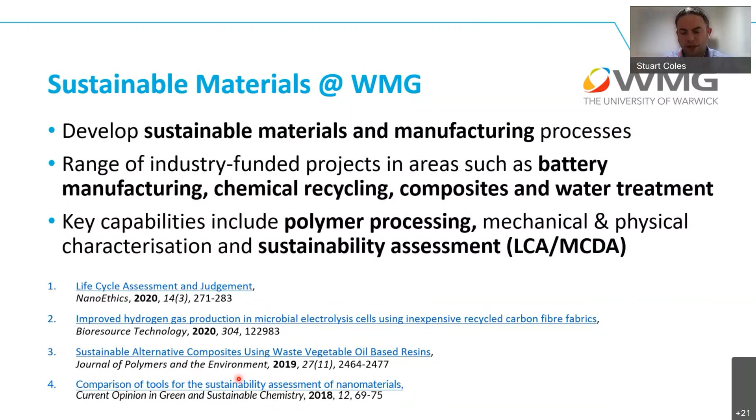So we start off with vegetable oil as a renewable feedstock. We know we can get vegetable oil everywhere, particularly in the UK. It's a crop that grows really well. Rapeseed oil, particularly during the spring and summer months, you can see lots of bright yellow fields up and down the country. So there's lots and lots of vegetable oil that's around. Very easy, cheap source of feedstock.

There is potential conflict maybe with using a food source material for non-food uses, but we have some information that suggests, certainly from work done by the World Bank, that perhaps the conflict between food and non-food use isn't as stark as people would like to think. But it does cause us a problem, and we'll refer back to it in a moment.

But we know we've got vegetable oil, and we can epoxidize it as well to create a material called epoxidized vegetable oil, which is a very large industrial chemical, well over 200,000 tons a year. Typically, it's mostly used as a plasticizer for polyvinyl chloride, and sometimes as well, it's a reactive diluent in epoxy resins. Only not so widely there.

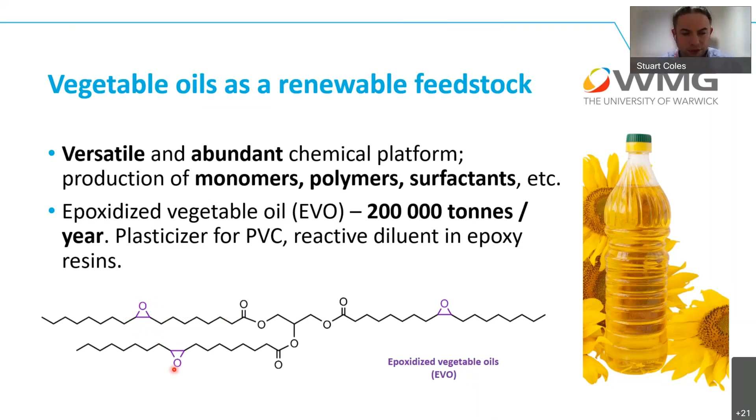Triglycerides generally look like this. We have like the three arms. This is what it would look like when it's epoxidized. So you've got these epoxide groups there. As I say, they can be ring opened, moved around, changed as and when.

Now, ideally, what we would like to do within the automotive space, certainly from my perspective as an academic in the area, we want to increase the amount of bio-based material within these applications. We want to reduce our reliance on fossil-based materials. But the problem with doing this is that the materials themselves aren't necessarily economically competitive. Often the weight or the performance or the cost gets in the way, and there become some real challenges in using these materials. We have additional insecurities in the food supply chain, plus concerns about that food versus non-food usage.

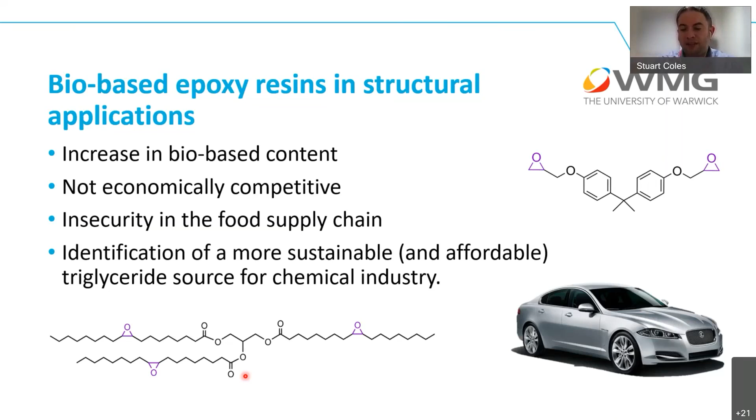And so because of these two key factors, what we thought was that what we should really try to do is avoid using a food-based material. Is there a more sustainable, more affordable oil source that we can access that would allow us something that at least reduces some of these barriers?

And we started to come across the problem of Fatbergs. Now, these are effectively very large lumps of fat and solid waste and grease that just congeal and solidify within sewer systems. Within the UK, it's estimated that around 70% of all of the blockages that you find in sewers are caused by these Fatbergs. And it's not only just the oil, but sometimes you get wet wipes from babies and nappies and other such things. Anything sort of solid that goes down the toilet congeals with the oils, and in the cold temperatures, particularly in the UK, when you can get well below freezing during the winter, it does make it very difficult for these materials to stay liquid, so they solidify and then they congeal.

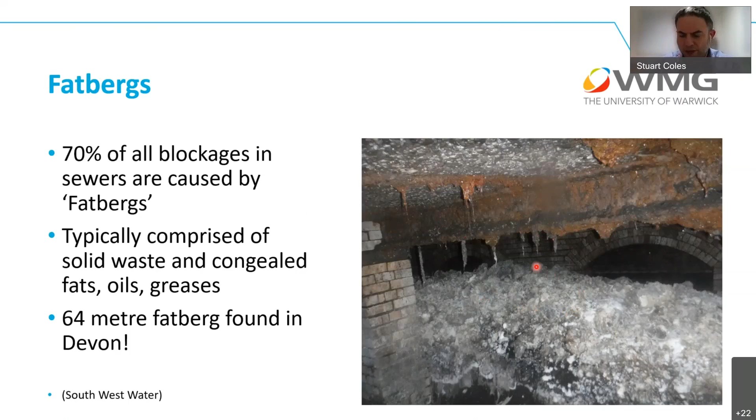The image here is one that is a picture of one that was 64 meters long, that was found in Devon, which is in the southwest of the UK. Probably the more famous one was the one that was entitled #Fatberg. And that weighed 130 tons and was the length of 2 football pitches, and found in London in the sewer systems there. It took nearly a week of intense work and road closures to clear that out. So there was a huge disruption and economic cost and problem from getting rid of this blockage in the sewer system, which in the UK is quite antiquated now.

So this was clearly a problem, but waste oil, fats and greases are ending up in the sewer system. So we want to avoid that and find a different use for our waste oils. Now, quite a lot of the time at the moment, waste oils will be used to make biodiesel. So you'll take your waste oil, turn it into biodiesel, and run a truck or a tractor or a car or whatever it might be on it. The issue with that is, in the long term, diesel engines are going to be phased out.

So we need to think about what options we have outside of that diesel space. Plus, the quality of the diesel fuel that you get from it isn't quite as good as what is conventionally there at the moment, and certainly not good enough for some of the more high power, high demand applications.

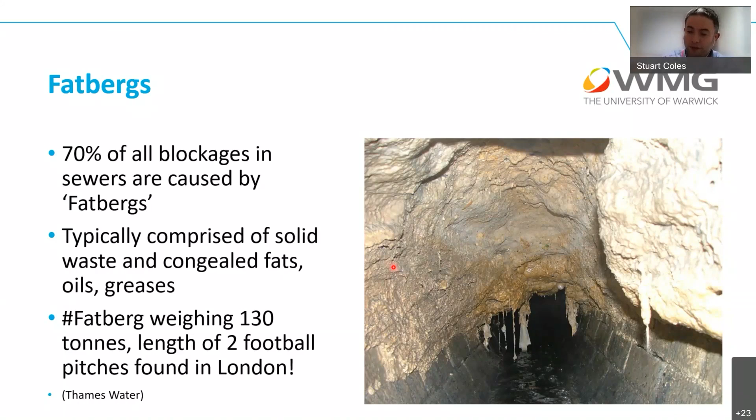So we get our non-edible and abundant source of triglycerides. We have a societal factor because we're reducing the blockages in the sewer system. It also helps tackle some of the oxygen depletion that you get in the water, because the fats don't cover the surface of the water.

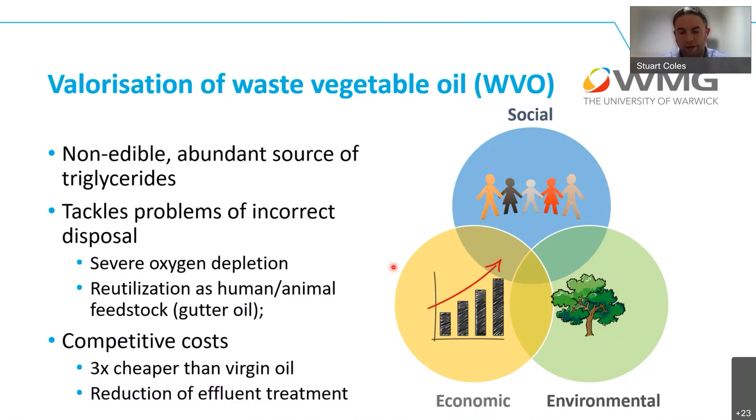We're not having people effectively try to reuse it as another feedstock for the food system. And we also get something that is economically cheaper than virgin oil and reduces costs of effluent treatment, and the economic costs of dealing with the waste, digging up roads, all of this kind of associated problem-solving after it's been broken down.

And so that to us meant that we were finding something that we could at least claim was a more sustainable source than what we'd done previously. So that became our starting point.

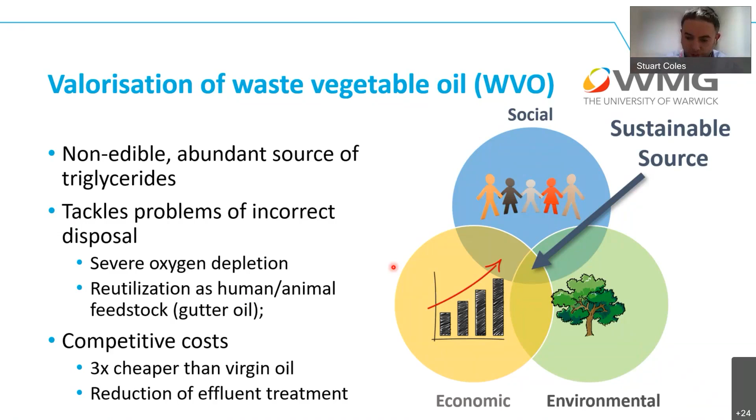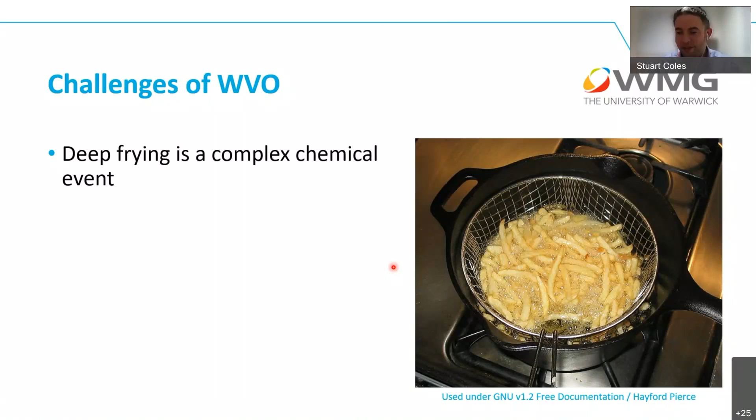But obviously, this waste vegetable oil was waste - it had been cooked with. One of the first challenges was understanding what was going on to the oil before we got to it. When you're deep frying, and in the traditional processes used for cooking oil, particularly in restaurants and large-scale food preparation, oil's largely used in deep frying, and that in itself is quite a complex chemical event when you look into what's going on.

You've got degradation processes happening to the oil, things like hydrolysis, because there's still water in there, and particularly the food that when you drop it in adds water to the system. You've got thermal oxidation of the triglyceride. You've got potential polymerization of some of the chains to make oligomers and dimers, trimers, etc.

All of this effectively reduces the degree of functionality that you have within that oil. So we started off with the oil having a nice versatile feedstock, but we know that through the cooking process we were going to start to reduce that level of functionality. One of our first challenges was to understand how much that functionality was going to be reduced, and whether we could mitigate it in any way, or whether it was actually going to be a problem in the first place.

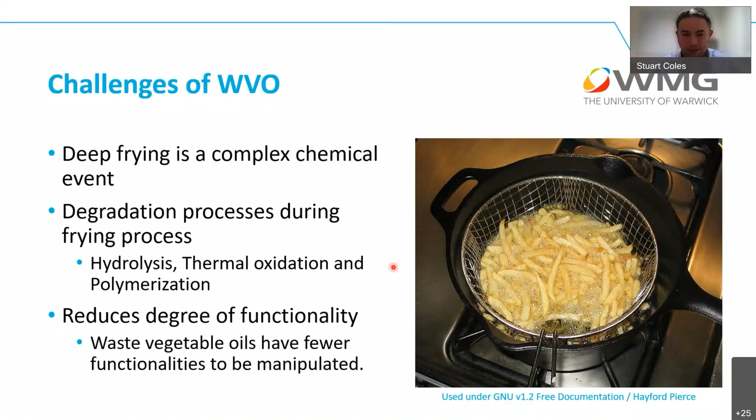So we've got a number of processes here, but we're looking at how much do we maintain as triglycerides, how much are we getting as mono, di and free diglycerides, free fatty acids, are we getting dimers and trimers, epoxies, are we ring-opening those with alcohols, and are there any other thermally degraded species in there as well?

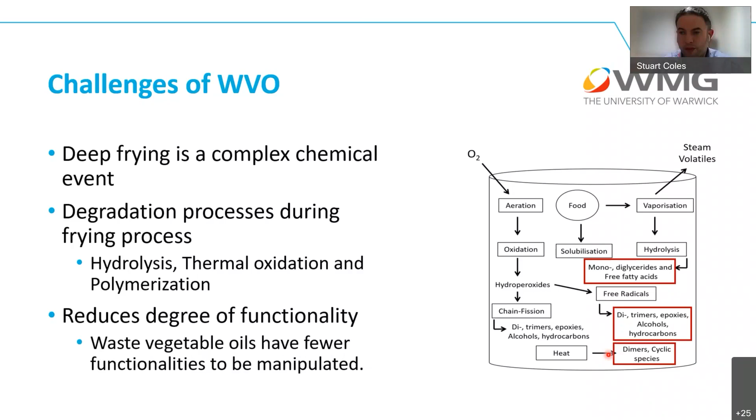So our first step was to just purify it and do some simple purification and epoxidation steps. The purification step, we literally stripped straight from biodiesel production - it was exactly the same process that we used there.

So you take the waste oil, effectively filter it to remove any lumps of burnt food and debris that are in the oil, and then add a very small amount of water. If you add too much water, you start to have the potential to produce soap, so you keep that to a minimum, but you do a small amount of water quite a few times in order to remove the polar compounds that you've got - maybe some of even the monoglyceride, some of the more water soluble materials, they all come out in that purification step.

And what you're left with is a vaguely clean triglyceride material - not perfectly clean, but it is certainly a lot cleaner than it was before doing that step.

From there, we knew that there were still some double bonds in those materials, so that gave us the door opening to allow us to get in there and do some functionalization with these materials. We tried a number of different routes with acetic acid and a little bit of sulfuric acid. We also tried a more traditional organic chemistry route using MCPBA and chloroform.

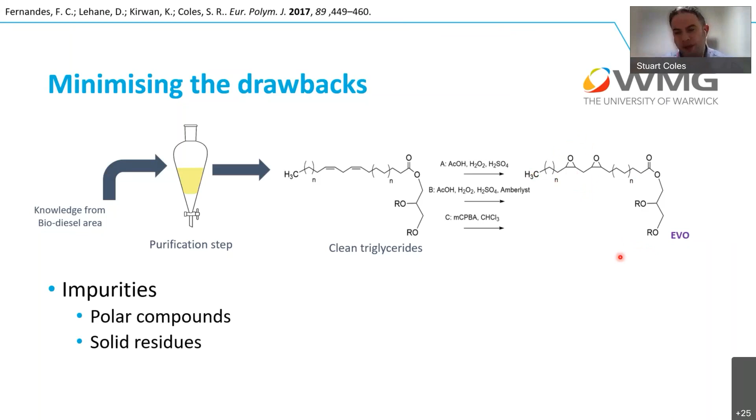That itself is not particularly unheard of, because epoxidized vegetable oil, as I already mentioned, is a very large industrial material. We're just trying to do it in a slightly cleaner, more sustainable way.

So once we got our epoxidized vegetable oil, we took the really just very basic straight approach. If we got a standard commercial DGEBA epoxy resin that was cured by an amine and then just dropped in a certain percentage of bio-based material, what would happen to the resultant polymer that we made?

So we added effectively 3 different types of the oil: the neat oil, so we managed to source the oil before it had been cooked with, after it had been cooked with, and then after we'd cleaned it up as well. And that's the 3 different stages that you see there: neat, purified, and waste.

The oil mix in itself, for completeness, was a mixture of palm oil and rapeseed oil, and it was sourced conveniently from the university's library cafe. So we were utilizing a waste material that existed on site that was a problem for us to deal with as well. Again, really ramping up the sustainability credentials of this work.

So with this particular oil mix, one of the things we found pretty much straight away, if we look at the Young's modulus when you add some vegetable oil based content in, is that across the board, the Young's modulus goes down. Absolutely not a surprise. We're adding effectively a material that is a known plasticizer into a system, and we get a reduction in the modulus.

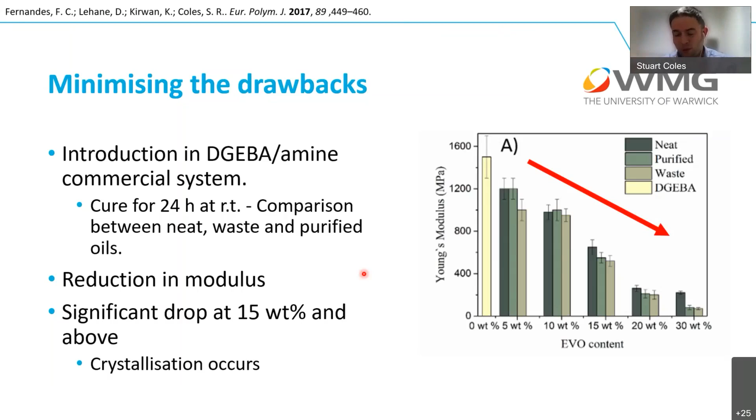And one of the things we looked at was this product here, which is effectively a milled carbon fiber. That's a reclaimed carbon fiber that's effectively a powder product, which can be used as a quite cheap, sustainable filler. It doesn't have anywhere near the environmental impact of virgin carbon fiber, because it's effectively reclaimed waste material that we're then doing something with.

And we did that from 1 all the way through to 30% of carbon fiber, with the standard DGEBA system and our 10% epoxidized waste oil. And we can see again that as we add carbon fiber in a composite structure, we get an increase. Now, we don't ever reach the same levels as DGEBA.

The DGEBA system is always better in terms of its Young's modulus in comparison to the vegetable oil one, but you can see a steady rise, and we're getting well over where we started with. So if we wanted to get back to that product system, or at least equal or exceed it, then the use of milled carbon fiber was a simple way of returning those properties and getting them back up. We've got 30% milled carbon fiber with 10 weight percent of the epoxidized vegetable oil.

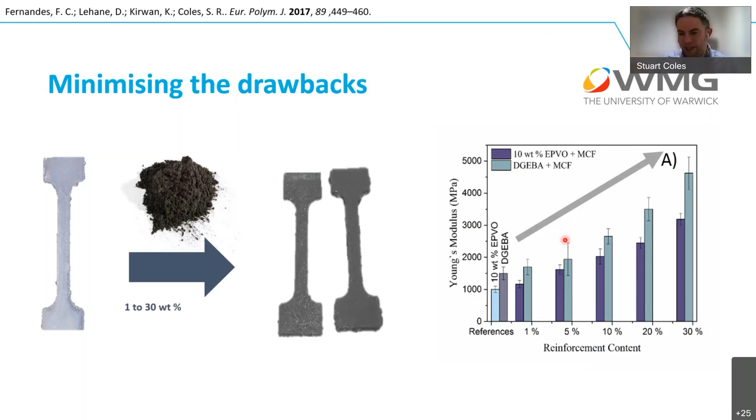One of the other reasons we found problematic was that the amine hardener in our system wasn't particularly good. It didn't really react with these internal epoxy rings. If you had the epoxy ring at the terminal, it would work really well, but here, because of the steric hindrance of these large bulky amine hardeners, we weren't getting a reaction. There are a couple of examples of what these amine hardeners typically look like within epoxy resin systems.

So one of the things we wanted to look at was whether we could change these cross-linkers and hardeners to something that would work better with our vegetable oils, while still maintaining reactivity with the DGEBA system, ensuring compatibility between the two.

We then looked into starting to optimize the formulation a little bit, and we did some design of experiments and statistical analysis to optimize for the best formulation we could think of.

One thing I didn't mention on the previous slide was that the difference between purified and unpurified waste oil, before and after, was fairly minimal. So the purification step was well worth putting in there for the consistency of the product. We just compared the purified waste oil versus the neat oil.

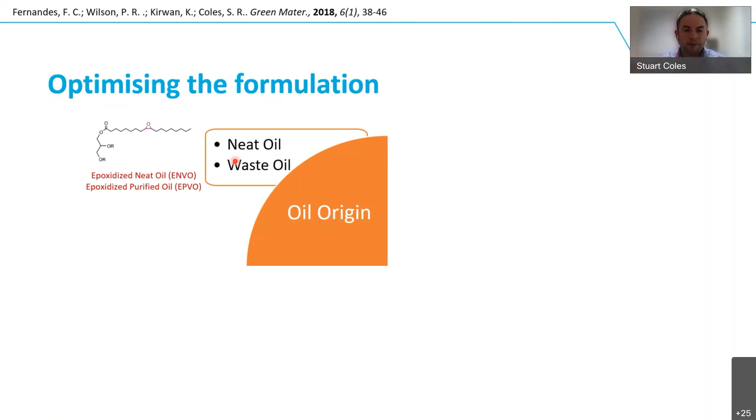Then we looked at the hardener, and we had two particular anhydrides: phthalic anhydride and methyl hexahydrophthalic anhydride, as two versions of different types of hardener. We varied the molar ratio of the hardener between 0.8 and 1.4, so maybe a slight excess of the oil or a slight excess of the hardener. Then as a catalyst to start this off, we tried two different catalysts as well, one being triethylamine and one being 2-methylimidazole. The idea was really just to do a broad range of experiments to find the best way to get the most bio-based content into a polymer without significantly dropping the properties.

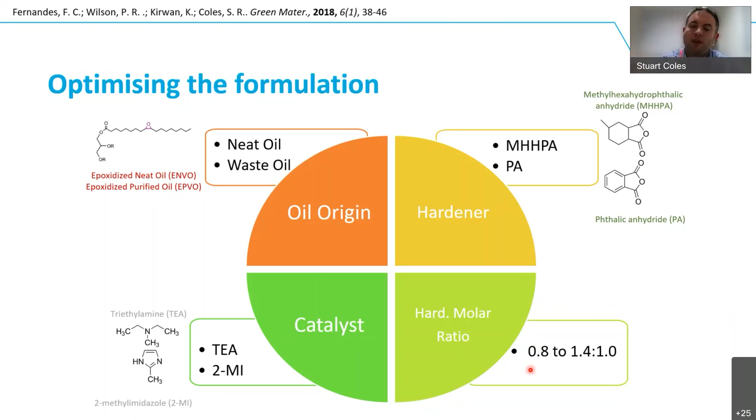So here, again, we did our blend of palm oil and rapeseed oil, after it had come out of the cooking, purified it with a little bit of aqueous extraction, and characterized the number of double bonds to know exactly how many we had. The difference between the neat oil and the waste oil was about 0.7 of a double bond equivalent. So we lost quite a bit of chemical functionality, but there's still quite a lot on average per triglyceride unit, well over two double bonds, so there's still enough reactivity there to do something with.

We then did the epoxidation, which was controlled. We see a little bit of a drop in the number of epoxy groups because of some side reactions going on, but it's still relatively in line with the oil, so we're not significantly differentiating between the two at this stage.

Then we added the hardener, which effectively ring-opens and cross-links to form that more traditional epoxy resin that we know. With that, we added either the triethylamine or the 2-methylimidazole with one of the phthalic anhydride hardeners, and had a curing regime of 140 degrees for 14 hours and then 160 degrees for 2 hours.

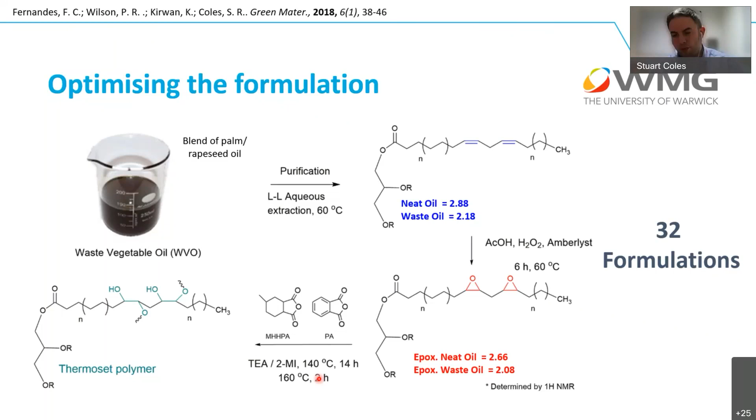When you put all of these different variations together, we tried 32 different formulations at varying levels, planned through design of experiments to find out exactly what were the dominant effects, what wasn't important, what was important, and what we should really focus on.

The first thing we found when we looked at some of these composites was that the thermal stability was pretty good. They were stable up to 290 degrees C, and then when they were starting to go, they were becoming less stable because of any unreacted hardener. If the hardener wasn't completely reacting, that was providing a little bit of thermal decomposition, which is entirely what you would expect.

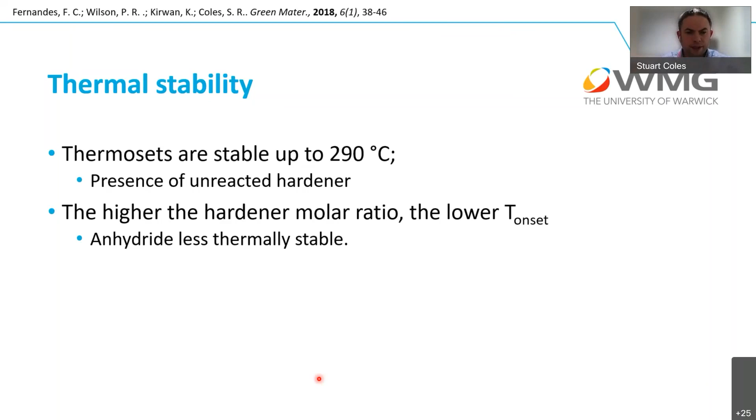So the higher the hardener molar ratio, the lower the T onset of degradation was, and typically the anhydrides were thermally less stable than the amines. We effectively have a vegetable oil rich network that had a T onset of about 324 degrees C, while an anhydride rich network would give us an onset temperature of about 290.

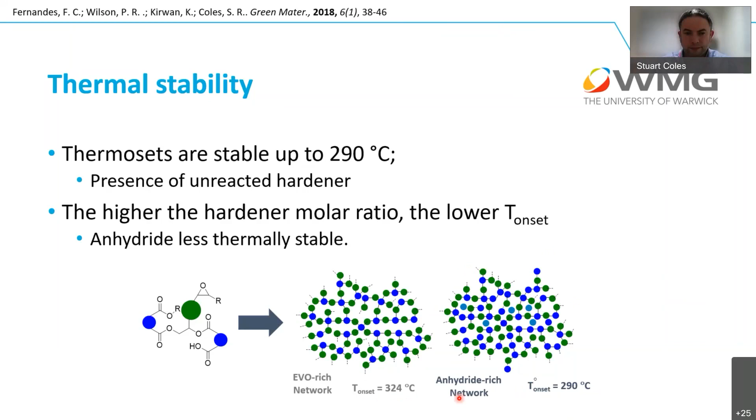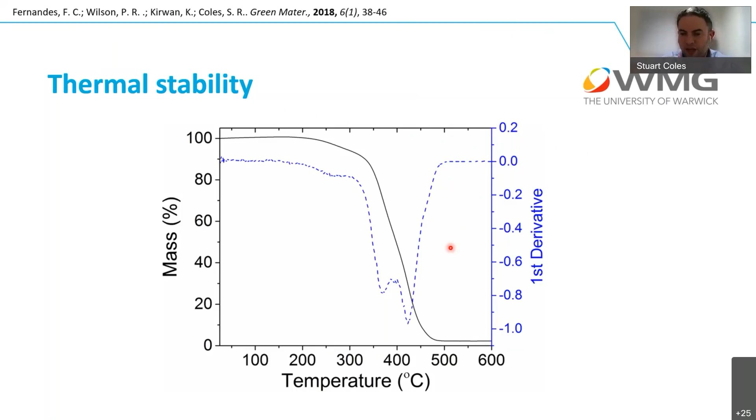This can be envisaged here. You can start to see that kind of drop with effectively the hardener event first, and you can see the difference between the two derivatives. There's actually two profiles as part of the degradation as well, which aligns with the fact that we've got two different sort of backbones of the polymers in there, with our more aromatic DGEBA epoxy plus the vegetable oil epoxy material. So these kind of results indicate, yes, that the polymer is in there, we are seeing a blend of these two materials.

We then looked at some DMTA just to kind of understand some of the mechanical properties of this system. The plot here is storage modulus against temperature. We found here that when we had more anhydride, we were getting stiffer material.

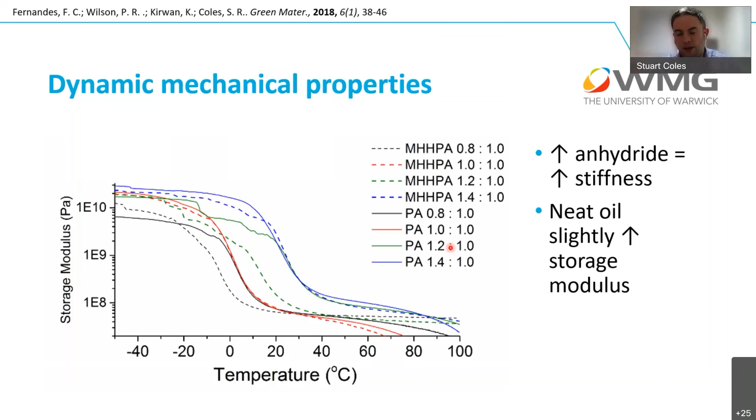Again, not a massive surprise, because we're increasing effectively the cross-linking density by having more of the hardener present, which you would expect to increase the stiffness of the material. The neat oil materials were slightly higher storage modulus as well. Again, it's got a slightly higher level of initial functionality that it can react with, so you would expect it to have a slightly higher cross-linking density and so on.

We then calculated the TG, and this is often one of the big ones that people look towards when they look at epoxies and structural materials. They look at the glass transition temperature, how stiff is it, what sort of operational range can we work in. We found that the TGs for this system were pretty low. We were going from somewhere around -4 degrees C up to 42 degrees C. Commercial epoxies are probably going to sit around 80, 100, 110 is not unheard of - certainly much higher than 42 degrees C.

This was when we started to think, well, these aren't going to be structural applications. We're going to have to do quite a bit of work on the TG in order to get it into that range where structural applications become possible. We did a lot of work - there's a lot of stuff contained within the student's thesis around trying to optimize these TGs to try and push them up to 40 to 50, 60, 70 degrees.

But it was ultimately we were unsuccessful in that area, and we expected to be unsuccessful. We tried because we wanted to see if it was possible, but the reality is that we're putting a plasticizing polymer into an epoxy network, and that is going to reduce the TG. We couldn't really avoid the physics in that situation - that vegetable oil chain, which is quite bendy and flexible, means that it lowers that glass transition temperature.

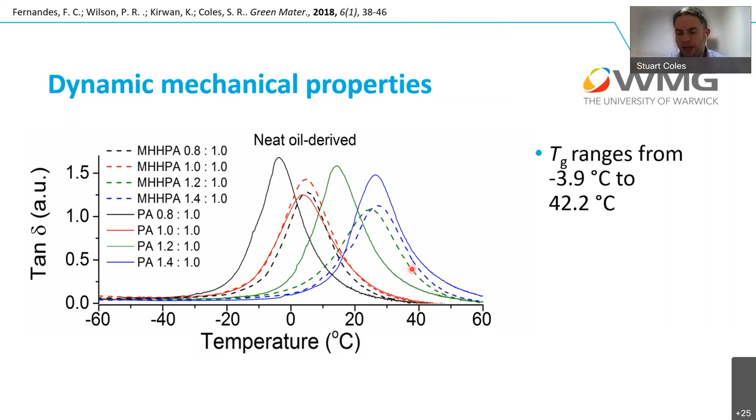So we knew that we had to think a little bit about the application and where we were headed at that point. We did, however, continue to look at the statistical analysis to see what were the important properties, and it was found that actually the interactions between all of our different parameters weren't significant based on a standard significance test. What were the important factors?

Was whether the molar ratio was high or not. We got the best mechanical properties at that high molar ratio. It did impact the thermal side, but the mechanical properties were best at that high molar ratio.

The catalyst was shown to be significant. The 2-methylimidazole worked much better than the triethylamine. We were getting much more significant increases in properties with that catalyst to start with. Solubility issues, steric hindrance, all electronics all kind of play into this area.

And then you've got the oil origin as the last factor. Effectively, if you use neat oil, you were getting a significantly better material than if you used the waste oil. This was one where we saw the data and we largely threw it out the window because we wanted to use the waste oil. It was like, yes, we know that the neat oil will get us a better one, but what if we use the waste oil? How far can we push it?

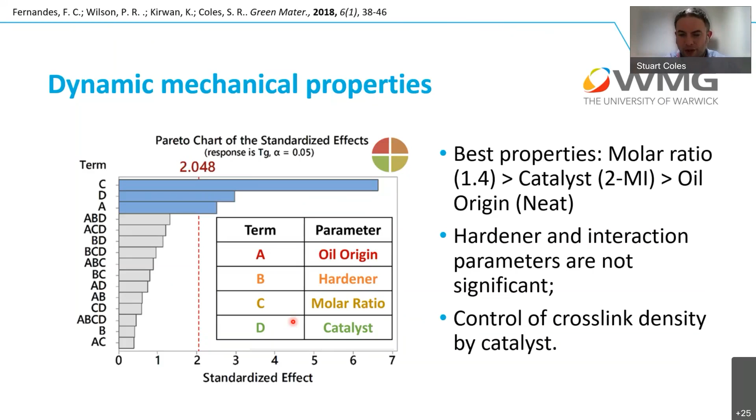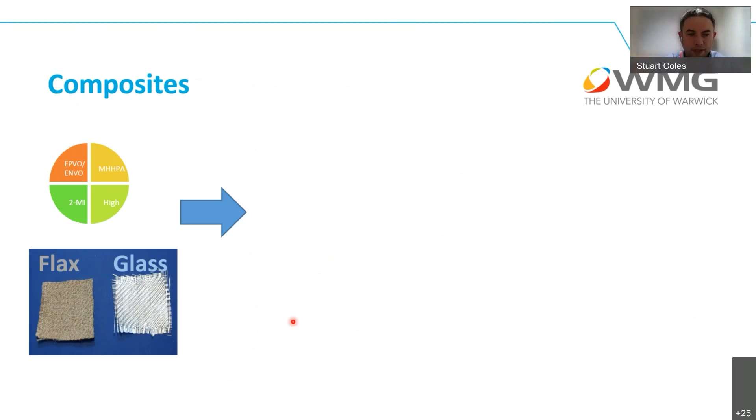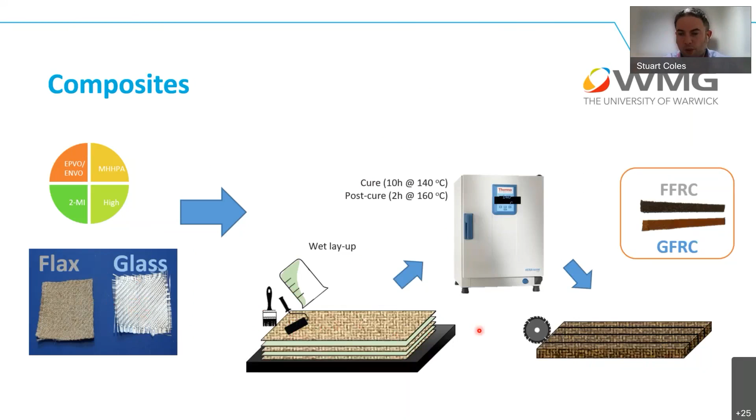So then we started looking at making composites out of these materials, and we wanted to see whether they were compatible with a variety of different types of fibers. Following a similar curing system, we made a flax fiber reinforced material and a glass fiber reinforced material, using our optimized polymer mix to see what sort of composite properties we were getting.

We found that with the change of the fiber type, we were getting increased levels of bio-based content, which is very good, and with the natural fiber, a lower density, which is great for lightweighting if we're thinking of automotive applications, but the mechanical properties were lower. We were getting reduced impact, reduced tensile strengths, and we found that the compatibility of these fibers with the resin wasn't particularly great. Our optimized epoxy resin didn't really seem to be compatible entirely with the fibers.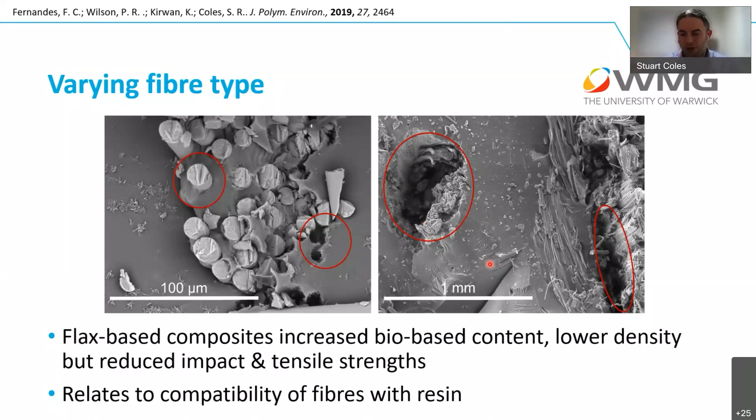We were getting lots of fiber pull out, as you can see here, lots of void content. It didn't look to be a particularly brilliant polymer composite.

So we looked at improving some of the fiber surface treatments to see if that would improve the property of the composite. Instead of doing nothing to the fiber at all, particularly with the natural fibers, we looked at using sodium hydroxide or stearic acid as two ways of going about it. The idea with the stearic acid as a fiber treatment was to give a surface similar in its properties to the vegetable oil based network, since we've got that long fatty acid chain. Potentially that would give us a little bit more adherence between the two.

Whilst we didn't have a great result in terms of the tensile modulus, the sodium hydroxide gave it a little bit of an increase. Tensile strength was largely the same, give or take a few percent. It was difficult to really identify whether or not we were having a really significant effect.

The stearic acid itself didn't really help with the mechanical properties, but it did help with the water absorption. Coating the fibers with stearic acid gave us significantly lower water absorption from the fibers.

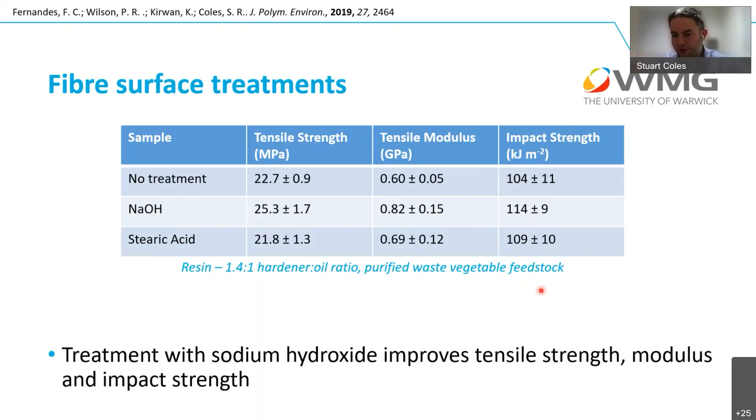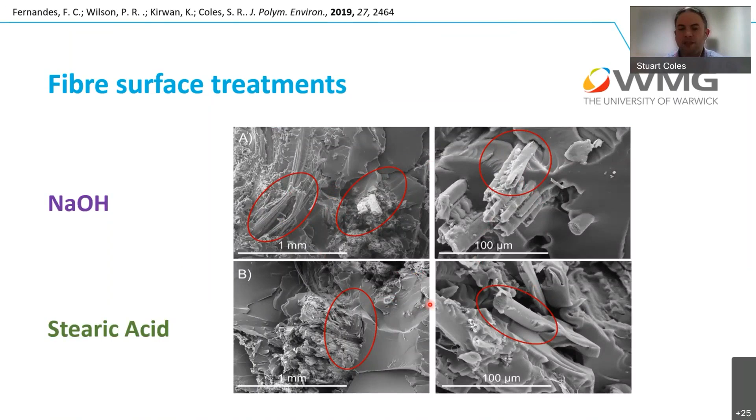Just some SEM images here showing the impact of some of the fiber treatments, that they still weren't particularly great. You get fiber pull out with all of them, largely due to the fact that even those fiber treatments couldn't overcome the incompatibilities at the fiber matrix interface between the fibers and the resins.

We compared that with the standard, and you can see straight away why our thinking was in this area. Just the standard DGEBA, tensile strength was much higher, tensile modulus was much higher, but the impact strength was much lower. We'd identified materials that had got a really good impact strength, and this was where we should be focusing our mechanical testing.

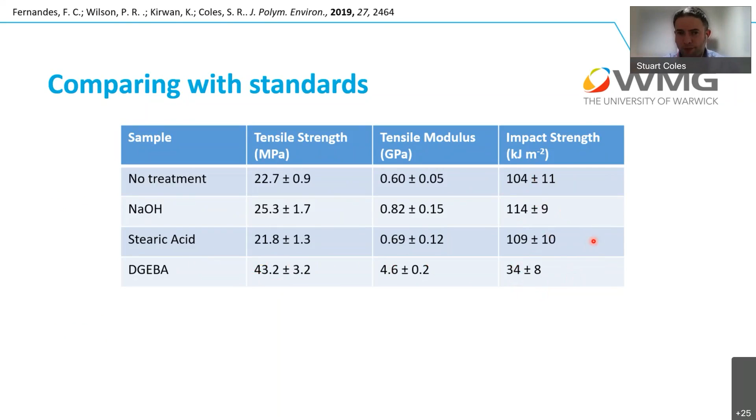It shouldn't be around making materials that are the strongest and the stiffest. Actually, energy absorption for us was definitely the way forward.

So we did a number of different formulations, again looking at the resistance to impact, and all of the formulations that we put together with various different glass fibers and flax fibers and different ratios of vegetable oil and hardener, all produced better material. It was effectively the reinforcing fiber. We were getting better stress transfer within the glass fiber biocomposites.

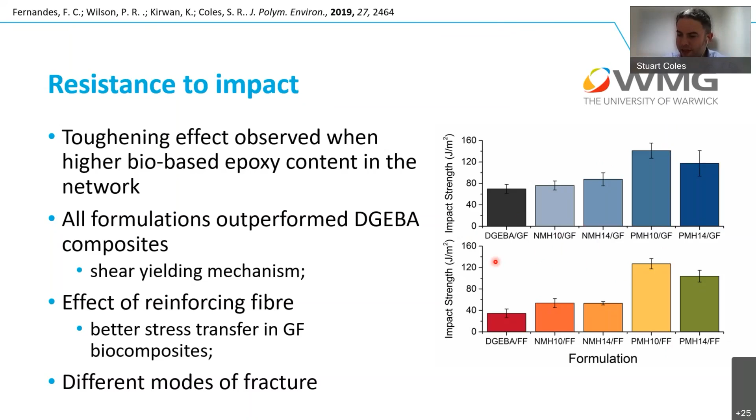We were getting different modes of fracture, and we were also starting to think about whether we were getting different modes of energy transfer through the composite. Were these polymer chains effectively having the ability to move and being a little bit more flexible? Was that helping to absorb some of the extra energy?

This gave us some thoughts about applications for a DGEBA formulation in composite structures. Could we add more and really push the vegetable oil content quite high if we weren't concerned with necessarily the highest strength and stiffness? Could we get something that would enable us to absorb a significant amount of impact and overcome some of the brittleness inherent with epoxy resin formulations?

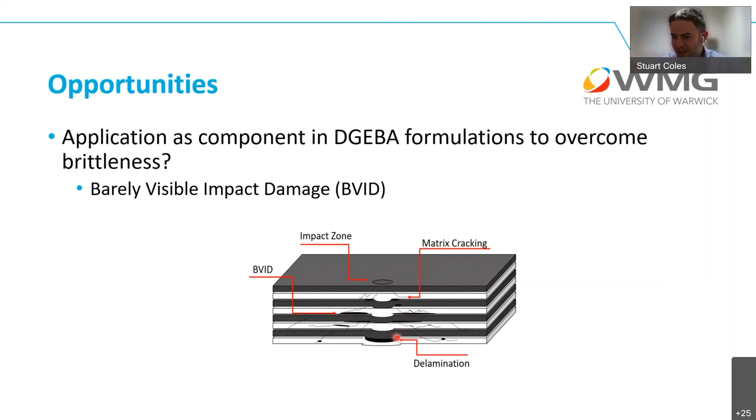One of the things we started to look at was barely visible impact damage, BVID. This is effectively an impact zone where, maybe in a workshop, a hammer or tool is dropped onto the composite structure, and you see very little damage on the top surface. But actually you've got cracks and fractures propagating all the way down through the system, and in some layers complete delamination of the material. This barely visible impact damage is a real problem in a lot of composite structures, so if we have a way of mitigating this, it might help us.

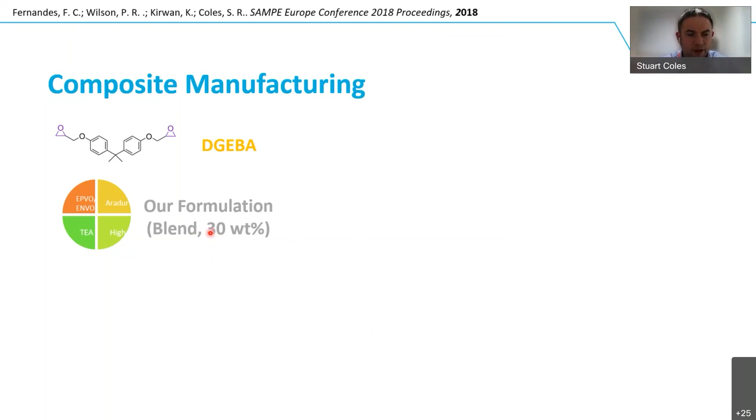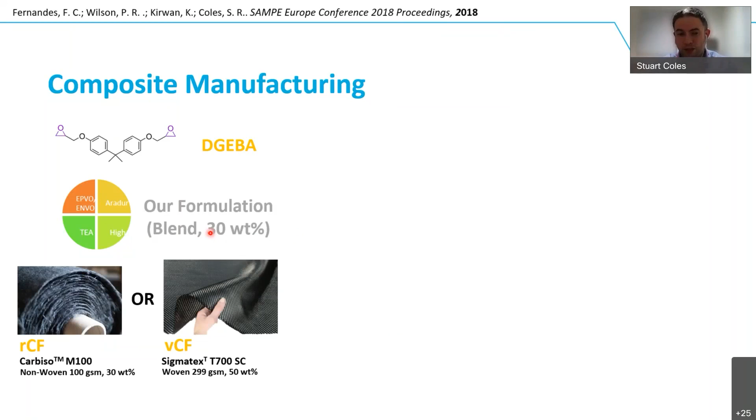So again we took our formulation, this time a 30 weight percent blend rather than 10 or 50, to try and get a nice optimized system. We followed through our systems, but this time looked at it with recycled and virgin carbon fibers, just to see how well we could push this. If we had the best type of reinforcement we could think of, were we really going to start absorbing some of the impact, and would we notice a difference between the DGEBA system and our resins?

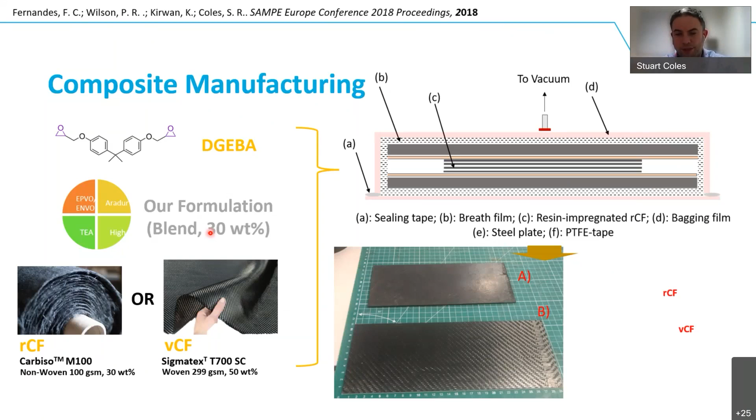We made them using traditional composite manufacturing with the two different fiber types. We tried to keep them consistent overall, even though we had different fiber diameters and fiber weights, to get a fairly consistent composite product in terms of the amount of material in there. And we created these carbon fiber composites, which had 30% bio-based resin in them.

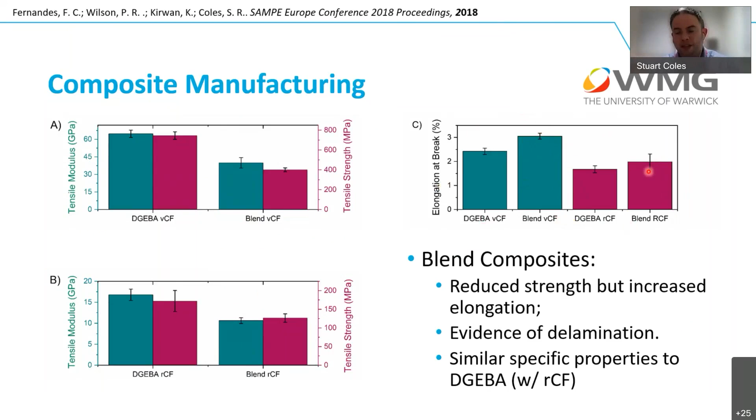We looked at the tensile modulus, and the bio-based blend was lower, as can be seen with the virgin carbon fiber. Tensile strength with the recycled carbon fiber was lower again as well, so we know the blend performed lower. We actually got a more ductile sample, as would be expected. The blended materials gave us mechanical properties exactly as we would expect in this particular area.

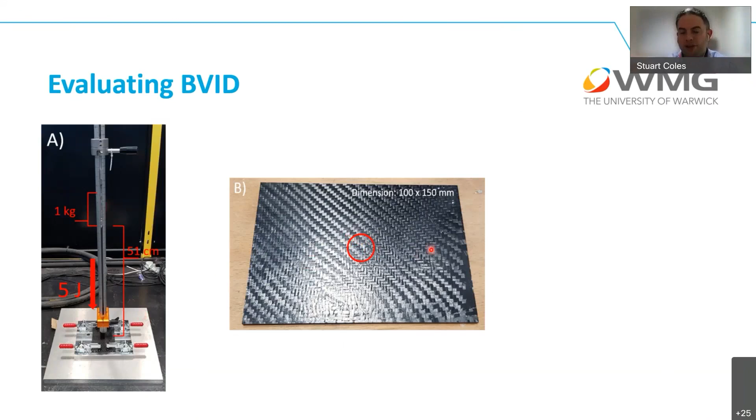But we wanted to evaluate that impact damage, so we developed our own testing kit, effectively a 1 kilogram weight dropped 51 centimeters to give us 5 joules worth of energy, just a little dent on our composite structures. It's really hard to see, no matter what size screen or projector you're on. There's a very small dimple in that composite that we've induced, and we're looking at that barely visible damage. It's the point of the name, barely visible.

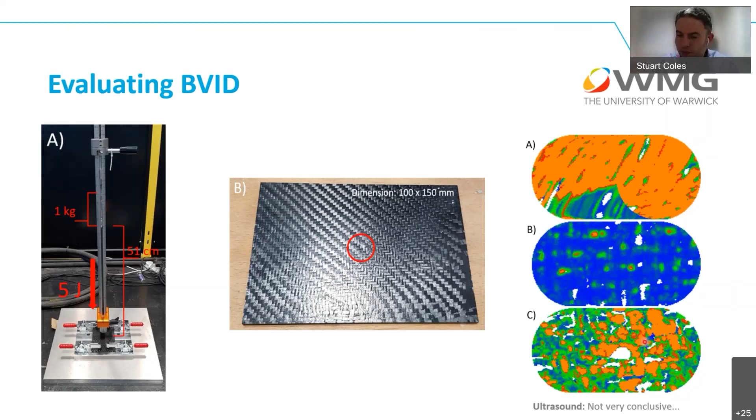We looked at a variety of different imaging techniques, from microscopes to spectroscopic methods, to try and see whether we could identify different layers and energy absorptions. We tried using digital image correlation to look at these events, but couldn't really see anything with that imagery - these pictures were all largely inconclusive about what was going on in the different layers. The ultrasound image doesn't tell us anything particularly either, and ultrasound is what people would traditionally use to diagnose these defects, but it wouldn't necessarily tell you there was an issue here.

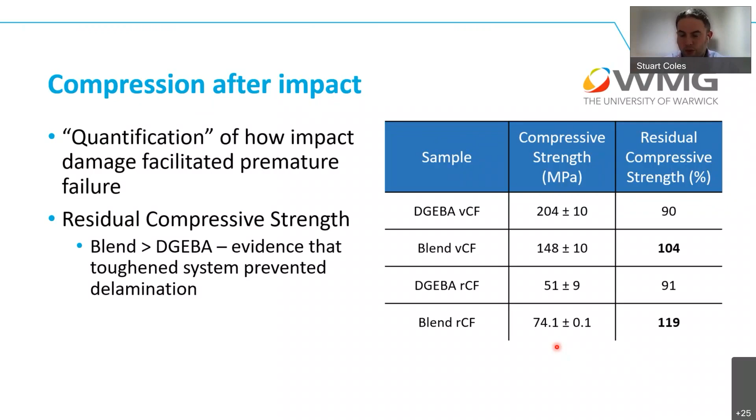What we actually looked at was the compressive strength before and after impact - what was that residual compressive strength? We found that in both cases, the blended materials actually had a higher residual compressive strength after impact, that they were effectively able to repair and improve some of that compression. They were mitigating some of the damage caused by that impact and barely visible impact damage. Effectively we had a toughened system, preventing some of the delamination that was occurring in the brittle DGEBA-only systems.

That was the conclusion of our work, that's where we got to. We got to a system that we'd optimized and then applied into impact structures, showing that we can get a bio-based material with better compressive strength even after impact, significantly higher than just having a standard epoxy material. You can do further work with surface treatment, and we can do work with different formulations to promote the amount of bio-based content we're able to get in there.

But fundamentally, where we got to was exactly where we wanted to be, in the sense that we'd taken a waste oil, we'd valorized it, added it into a commercial system, reduced the amount of fossil fuel and fossil reliance of that composite to make something that was better than where we were previously. And that for us was a really significant result.

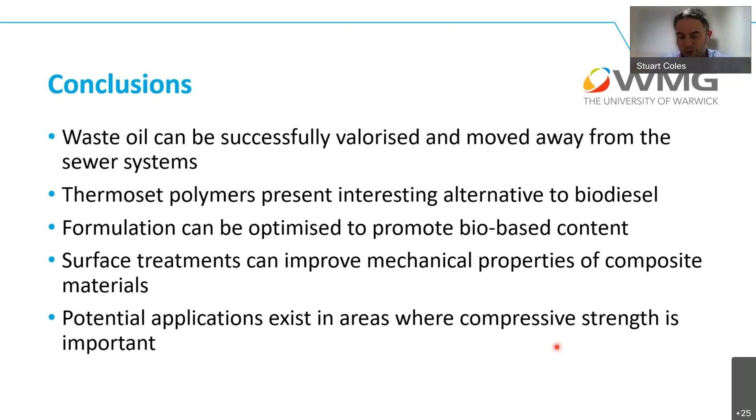I'd like to thank Felipe, whose PhD this was largely based on. He's now back in Brazil, but CNPq was his funding organization. Danny and Peter did some of the work as well in various other things. Kerry supported this work consistently throughout and was Felipe's other PhD supervisor. So they're the people who did the work along with myself, and I'd like to thank them. Certainly I'd like to thank CNPq for funding, but most of all I'd like to thank you all for listening, and again thank you for the invitation.